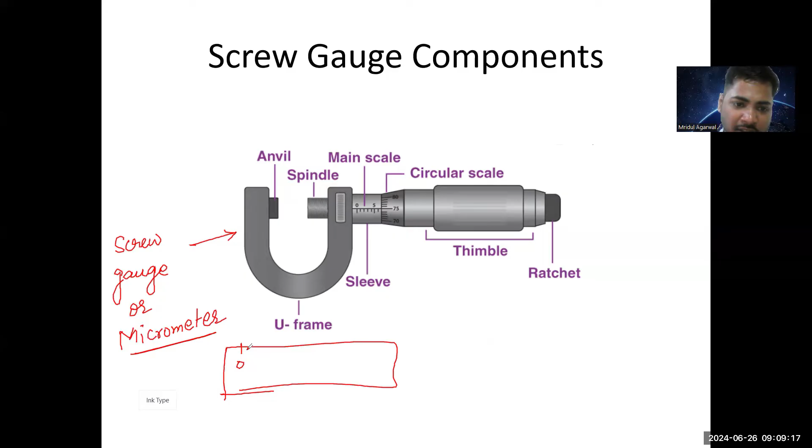Since you have used your daily scale, you have 0, then 10 divisions like this, and this is 1. You generally measure around 0.1 centimeter from this. But by using a screw gauge, you can measure up to higher precision limits, up to 10 to the power minus 6 meters. You can also convert it into microns, and this is 1 micrometer only, so you can measure up to higher micrometer precision value.

So you can have a very precise measurement of whatever you are measuring. Let's say you want to measure a thing that has dimensions of 2.003 meter. In such a case you can measure up to this decimal place, up to 10 to the power minus 6 into 10 to the power 3 mm per mm, which is around 10 to the power minus 3 mm. So this is a very nice component in terms of measuring components to a very high precision value.

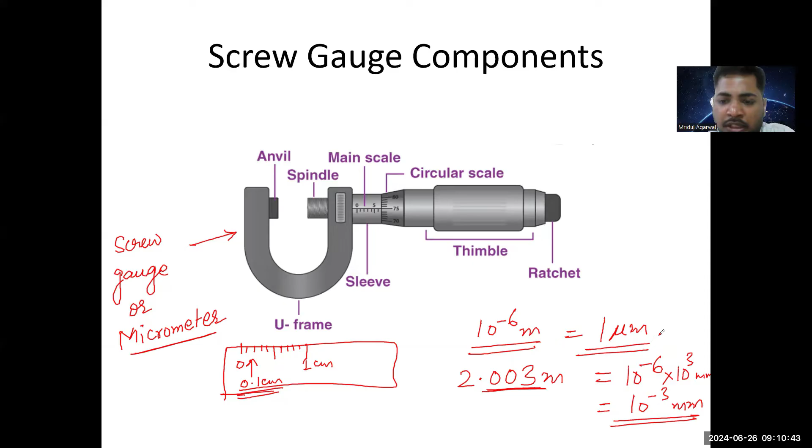We'll be talking about this zero error some time later. First, we'll discuss the working of the screw gauge.

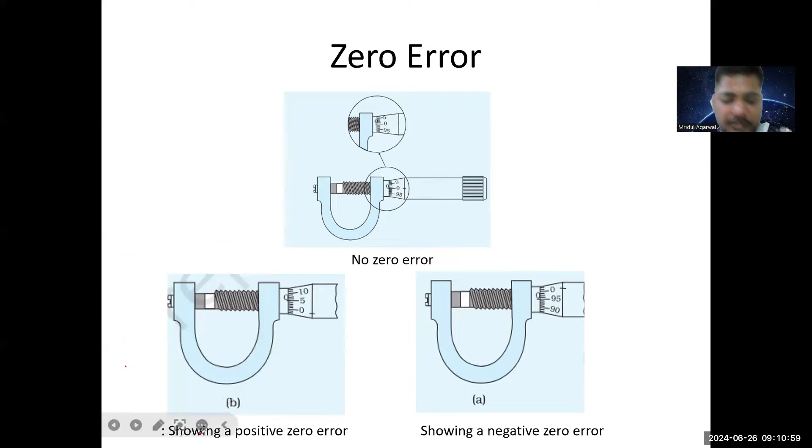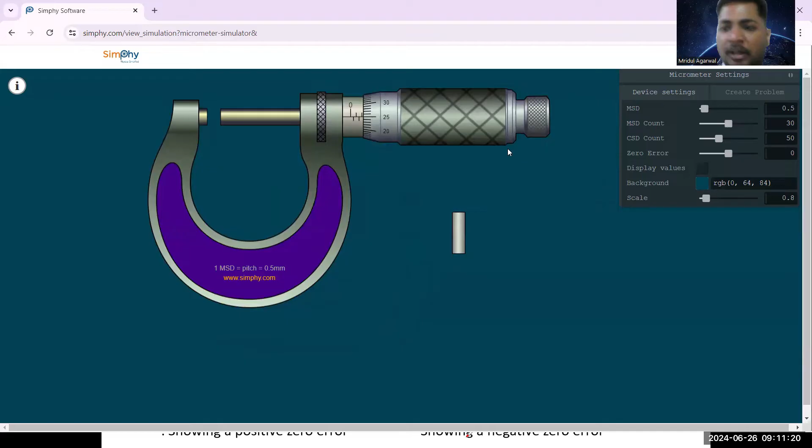In front of you, you can see a screw gauge like this, and you have a component like this. You can change the micrometer values according to your requirement. In this case, we are trying to measure the length of this component, and we'll adjust our screw gauge accordingly. Let me tell you about it.

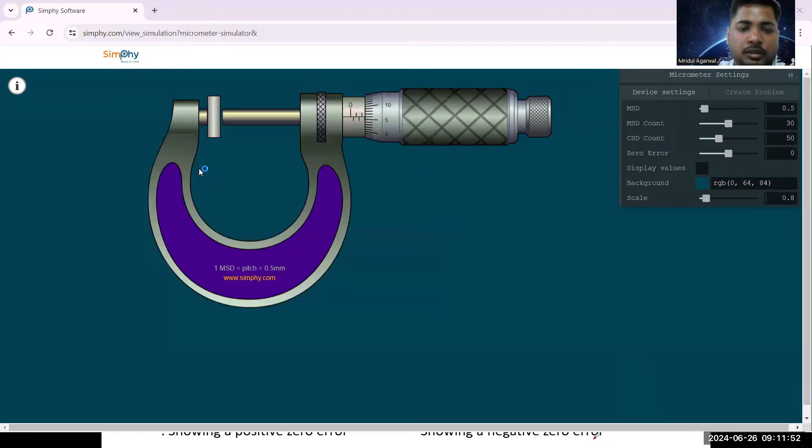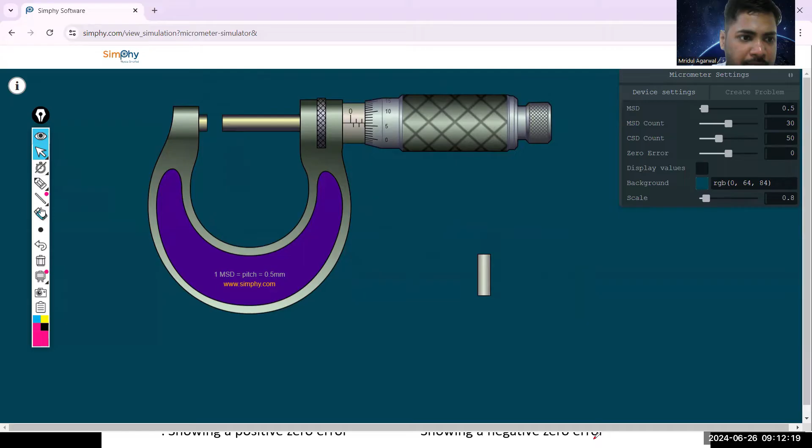Let me take this example. We have a component like this, and we want to measure the length of this component. Which length? This length we want to measure.

We have a linear scale like this. This is your linear scale. This is very important that you remember: this is your linear scale, and this is your circular scale.

You must have used screws in daily life. You've seen that when you try to rotate the screw, let's say you have a screw like this and you rotate it, it goes inwards. And when it goes inwards, it has some rotation involved in it.

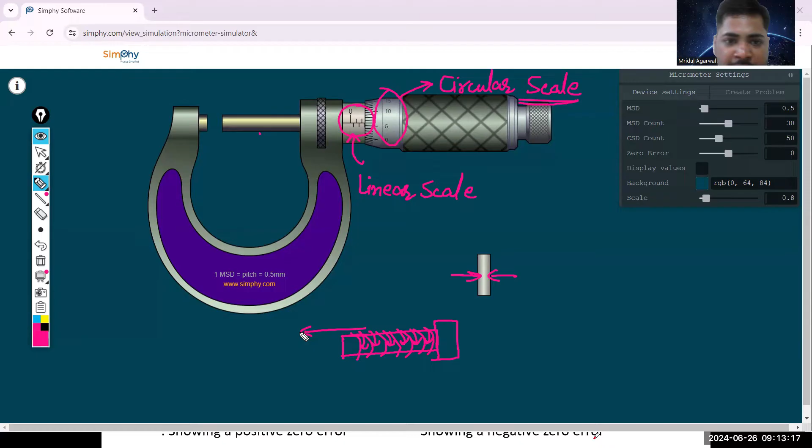Similarly, what happens here is when you put a component inside it, let's say this component is placed inside, you rotate this, and you get some linear scale reading and some circular scale reading. Depending on that, you measure the length and the values.

So we'll measure the length of this component. Let's say this is the dimension d that we want to measure. So how will you measure this dimension? In order to identify the length of this component, we'll have two readings.

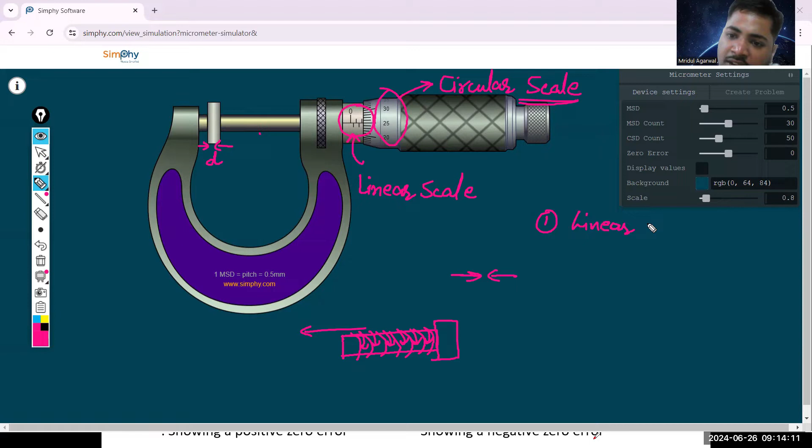First is the linear scale reading. From this we get the main scale divisions, and there's a rating written like: 1 MSD is equal to 0.5 mm. So this is one division. When talking about the division, we can count like this.

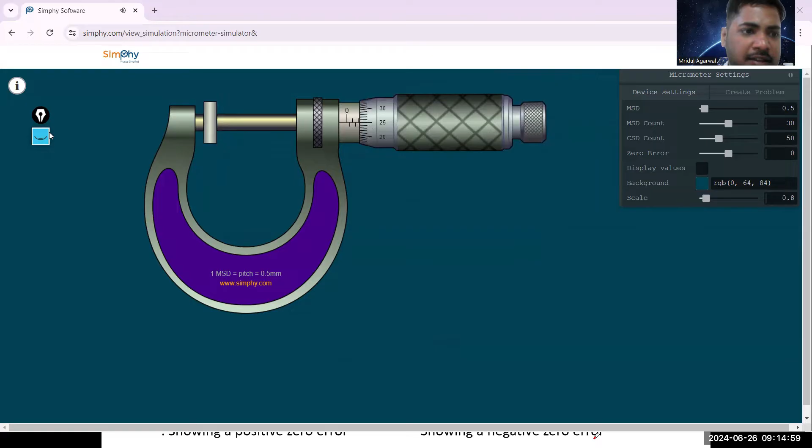You can also zoom like this. So when you put this component inside, what happens? Then you measure the linear scale reading. Let me rub this so you're able to see it clearly from the linear scale.

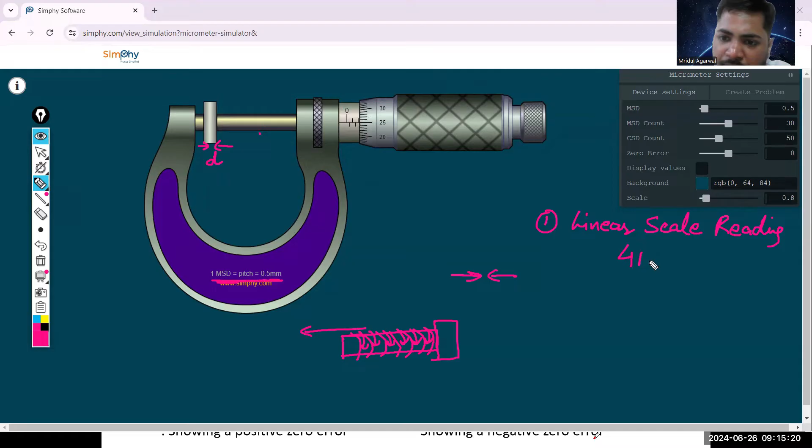You measure this: 4 divisions. So we have a linear scale reading of 4 MSD. So this is the linear scale reading, currently 4 MSD. And what is the value of 1 MSD? One main scale division is equal to 0.5 mm. So this is 4 times 0.5 mm, which becomes 2 mm.

Now we have the second reading that we want to take, and this is the circular scale reading. If you can see, this 25th division is coinciding with the linear scale. So the circular scale reading is currently 25.

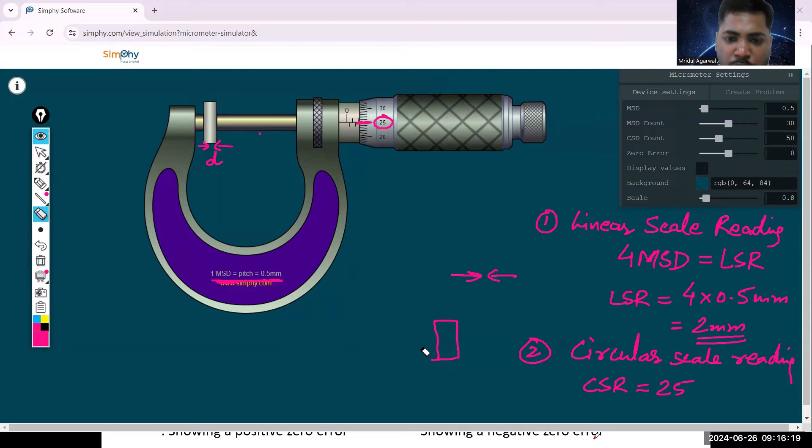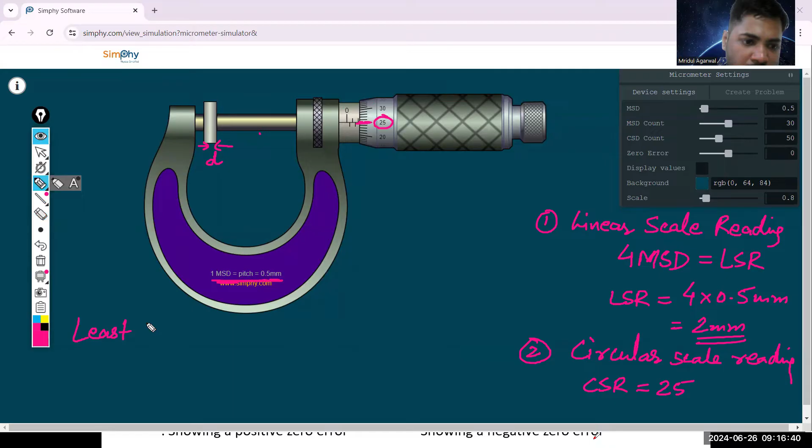And what is the least count of this screw gauge? For defining the least count, you have to understand this concept of pitch. What is pitch? Here we can see that when you rotate it one time, it moves some linear distance in the direction of the linear scale movement. Whatever length is traveled by the linear scale when you rotate it one time, that length is known as the pitch of this screw gauge.

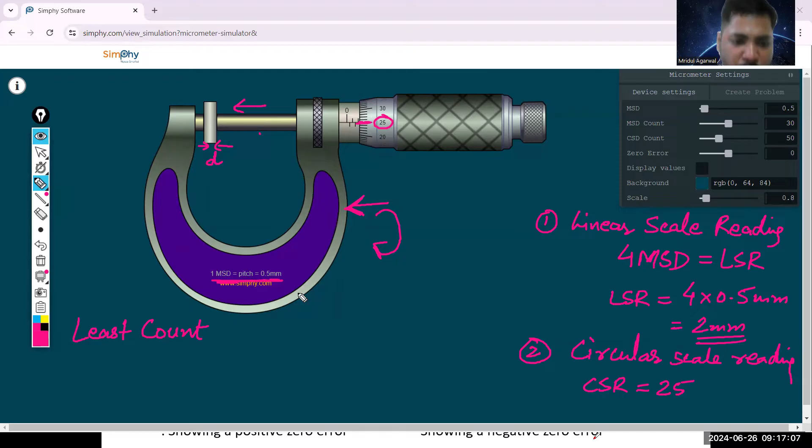So what is the pitch? Pitch is the linear length traveled by the linear scale on one complete rotation of the circular scale.

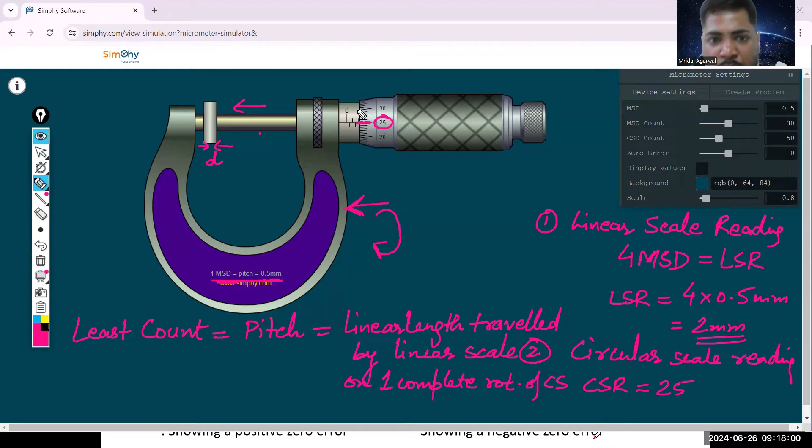And what we are trying to do is divide this pitch by the number of divisions on the circular scale. Why are we doing it? Because we want to find the length of one circular scale division in terms of the linear scale in a screw gauge. So we are going to divide by 50, because we have a CSD count of 50. So it means we have only 50 divisions available on this screw gauge.

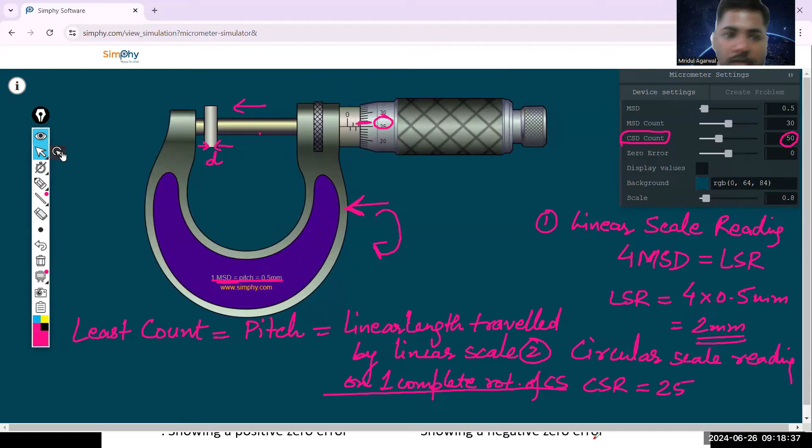We can also see this like this. You remove this, just a minute, and you remove this. You can see that it's only going up to 45 and then 0, isn't it? It goes up to 45 and then 0. So that means it has only 50 divisions involved in a complete rotation.

And for a complete rotation, it moves a linear distance of how much? That is pitch. Let me bring it to the original view like this. So the number of divisions involved in one complete rotation of this screw gauge is 50, as per the given condition.

Now this pitch divided by 50 would be our least count, because that is the minimum value we can measure using the screw gauge. So what is the pitch here? It is given as 0.5 mm. In any question, it will be given. So here the least count becomes: least count is pitch divided by 50, and this is 0.5 mm divided by 50. When you solve this, this becomes... let me rub this.

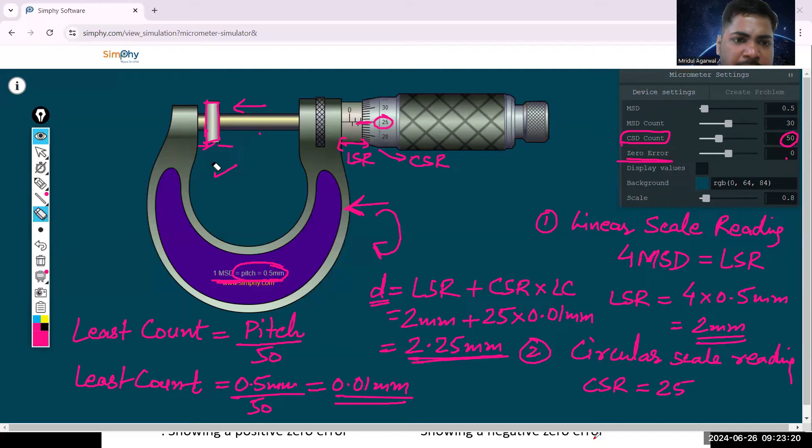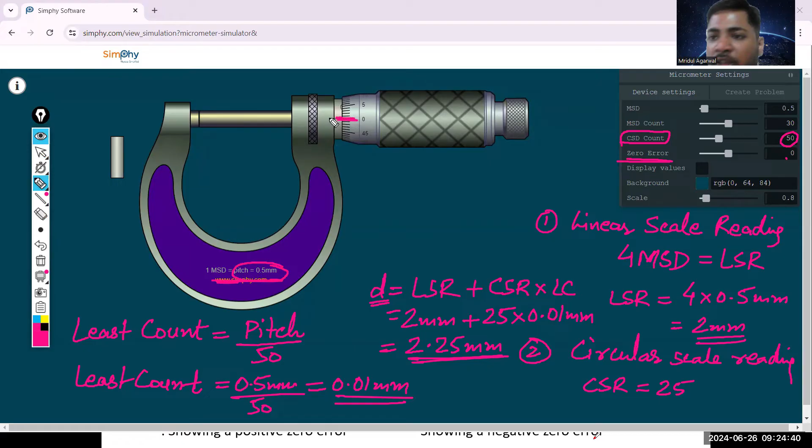When you bring this circular scale into contact with this linear scale, what happens? It's possible that at the initial time, when you are not measuring the length of any component, you are just trying to put these two hands, these two spindles, into contact directly without putting any component in between. When you bring it into contact, you can see that the zero is coinciding with the zero. The zero of the linear scale is coinciding with the zero of the circular scale. When that happens, then you have no zero error.

Now suppose these two spindles are joined to each other, and we have a zero error in this case. Let me show you how. Over here, we can see this is completely a 50 circular scale division screw gauge, and out of that, the 40th division is already coinciding with the zero of the linear scale initially. So when you are putting no component in between the spindles, the 40th division of this circular scale is coinciding with the zero. So the zero of this circular scale is above the reference line, and when it is above the reference line, we have a negative zero error.

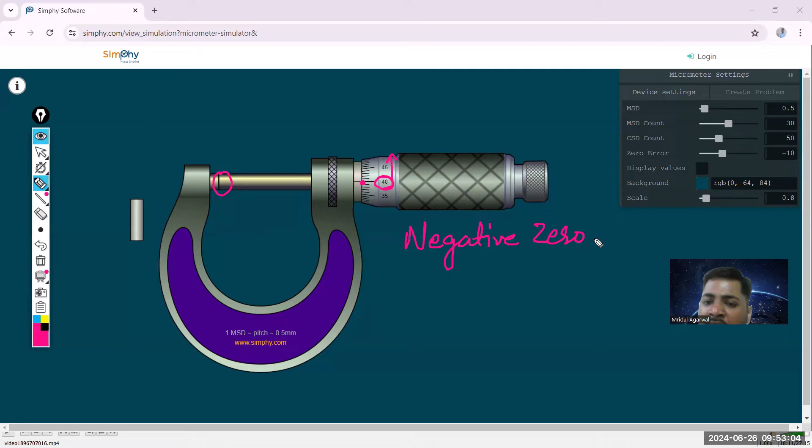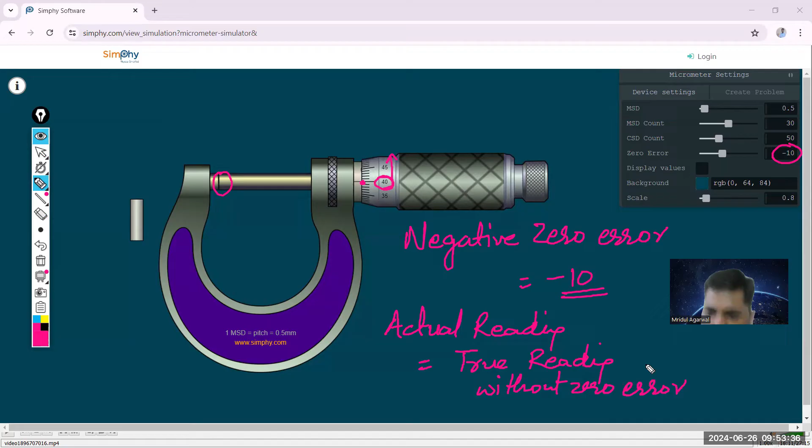We have a negative zero error. And by how much? The zero of the circular scale is above the zero of the linear scale by 10 units, you can see that. So we have a negative zero error of minus 10. So when you are taking the readings, the actual reading would be the true reading without zero error, minus the negative zero error. So this minus 10 has to be multiplied with the least count, and then it is to be subtracted from the true reading.

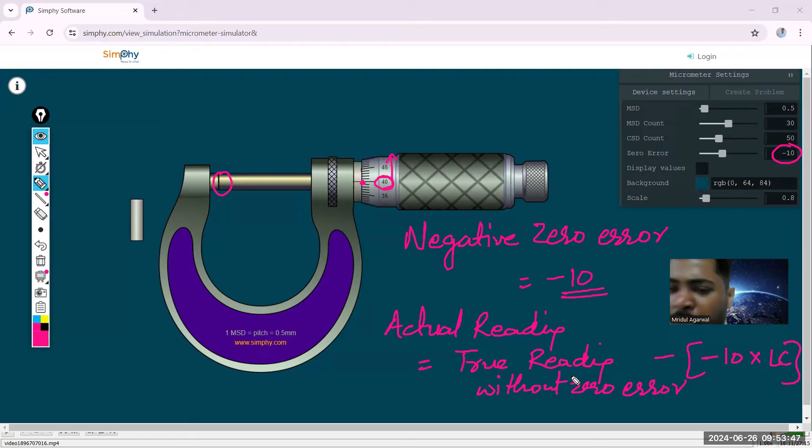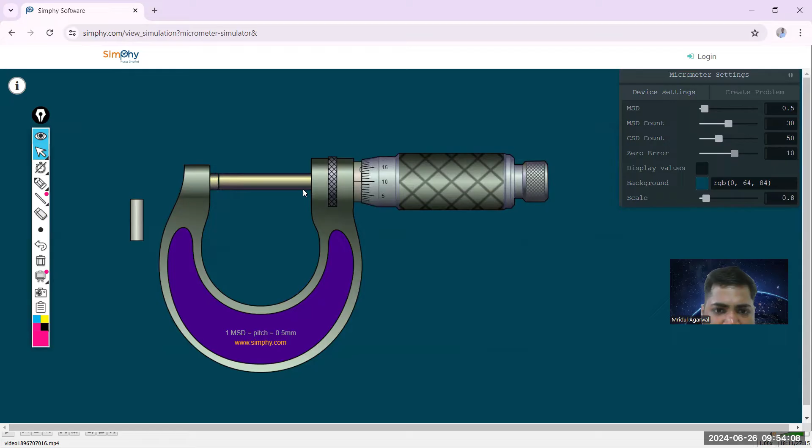Now, if there is a negative zero error, this is your case. When you have a positive zero error, what will be the case? Let me show you this. Suppose you have a positive zero error of, let's say, 10 units. Then the zero of the linear scale is coinciding with the 10th unit of the circular scale. So in this case, the two spindles are coinciding with each other, but the zero of the linear scale is coinciding with the 10th unit of the circular scale. So in this case, there is a positive zero error.

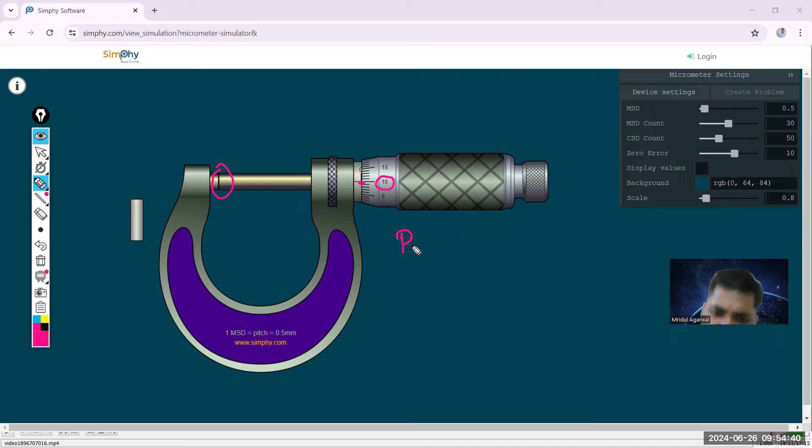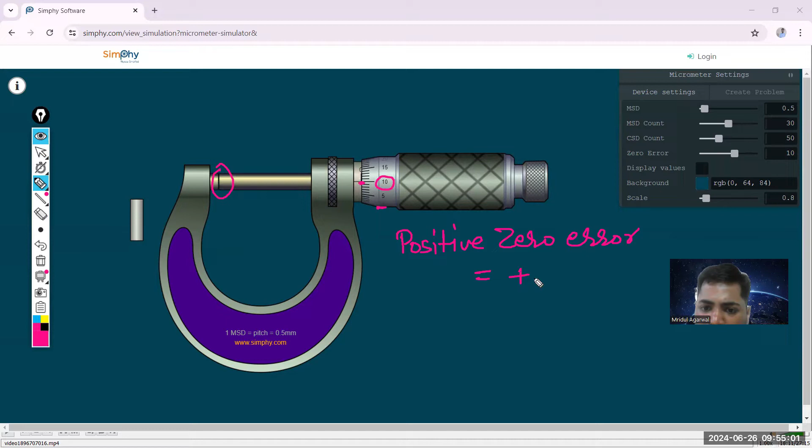There is a positive zero error because the zero of the circular scale is lying below the zero of the linear scale by 10 units. So this is the positive zero error of plus 10 into least count.

For the reading to be taken, you have to take the reading without zero error, the without-zero-error reading, and then you have to subtract this positive zero error.

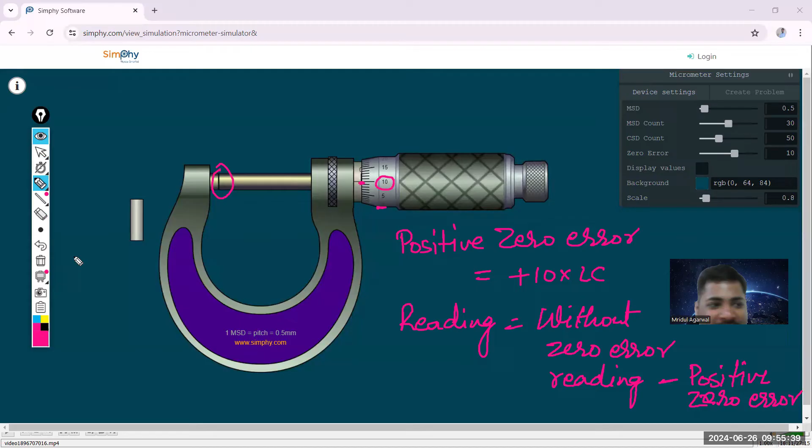Why do we have to subtract and add? This thing is a bit logical, and these are not given in the books also. So first we try to understand why we are subtracting or adding.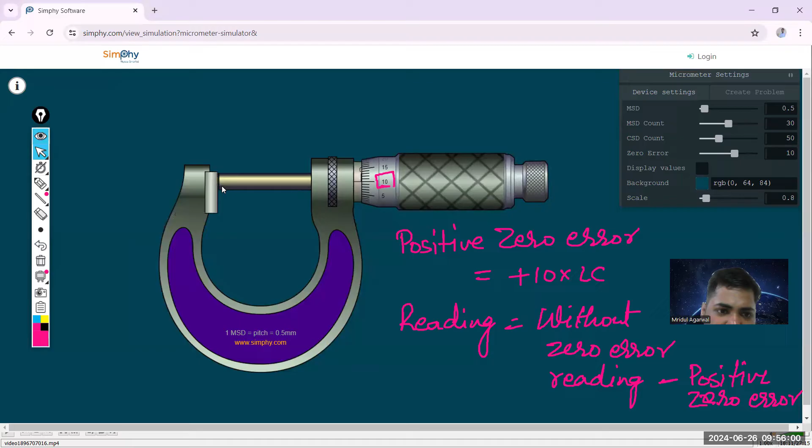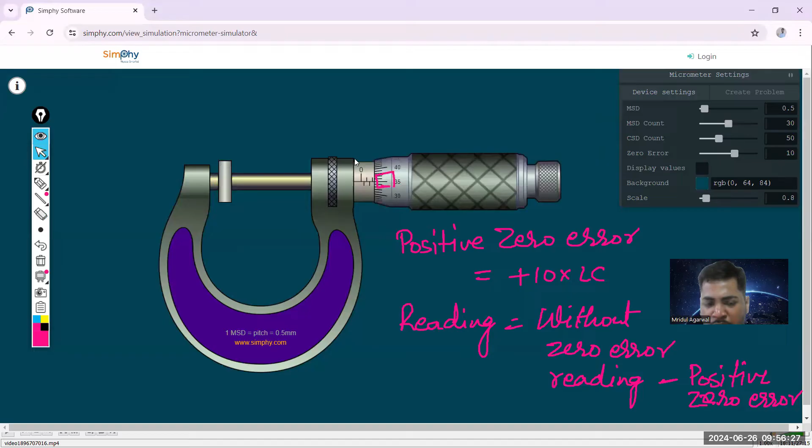Let's suppose you are already 10 units above, and when you are putting this object between them, then definitely your reading is going to be increased. But whatever reading is displayed here already has a zero error of plus 10 into least count, because when this component was not there in between the two spindles, the zero was not coinciding with the zero.

Let me show you: the 10th division was coinciding with the zero of the linear scale. So in this case, it must have rotated anti-clockwise from your direction, starting from 10.

And going to, let's say, 35. So it must have moved only 25 in real sense. So it must have moved only 25.

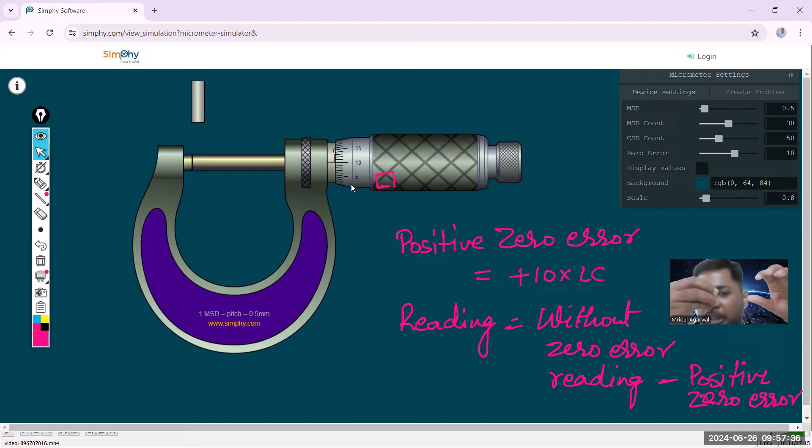So you just see what you are trying to do: you are taking the net reading as 25. Why? Because what you see is 35, but there is already an extension of 10 units when no component was there. So when there is no component between the spindles, you have 10 units, and now you are displaying 35 units. So there must be a rotation of 25 divisions only. That's why we are subtracting this positive zero error.

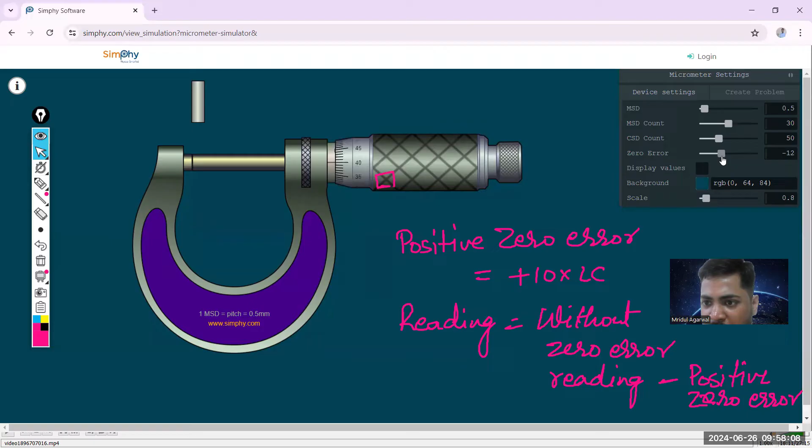In case of the negative zero error, what is happening is we are already behind. Let's say we are behind 10 divisions.

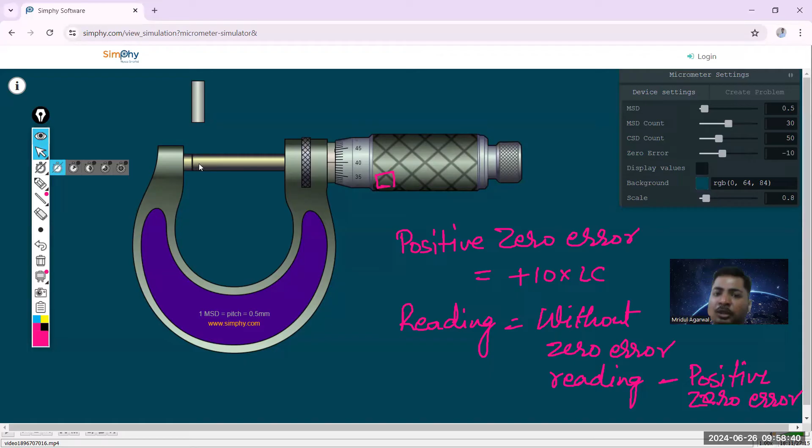So what is happening like this? Now, when you are putting these two spindles together, the 40th unit is displayed and the zero is above. So when you are rotating anti-clockwise from your end to put any component in between, then definitely you have to have rotation.

And whatever rotation has taken place, let's say it goes from 42 to, let's say, 25 or 35. So what it says now, here it is 15 - so how has it gone to 15? It must have gone to 15 units from 0, and then that 10 units extra, because you started from 10 units early.

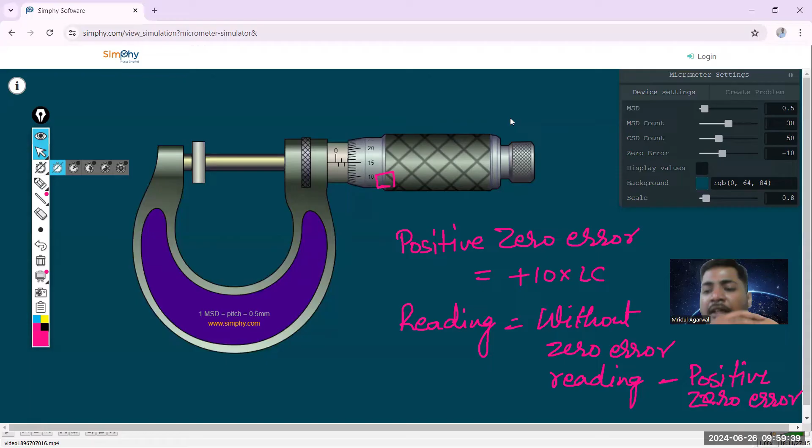Because it was displaying 40. So when you are moving it anti-clockwise, you are rotating it by 10 and then 15 to get to the point of 15. So actual rotation is 15 plus 10 times the least count. That's why the negative zero error is coming into place.

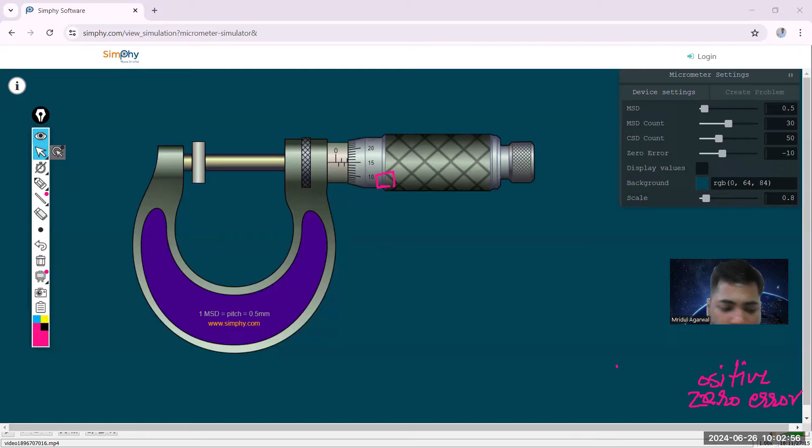चलिए देखते हैं यहाँ पे। मान लेते हैं आपके पास ये पहली प्रॉब्लम है। आपको क्वेश्चन में दिया हुआ है कि 10 rotations of the cap of the screw gauge is equivalent to...

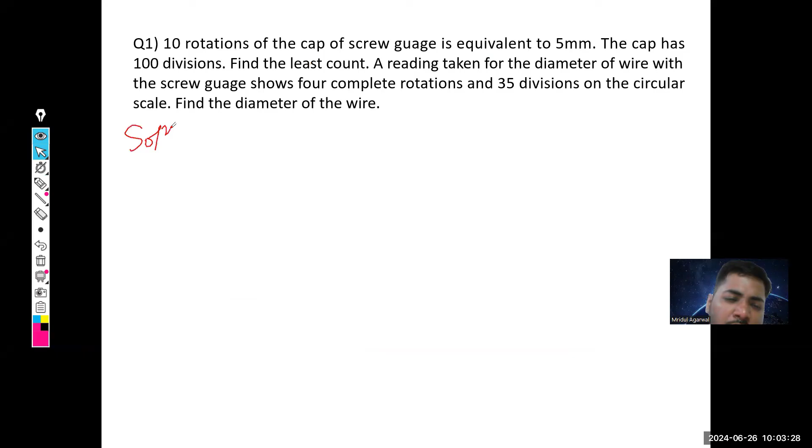10 rotations of the cap of the screw gauge is equivalent to 5 mm. So for one rotation we have to find the pitch. अगर मैं pitch की बात करूं तो one rotation के लिए pitch कितना हो जाएगा? 5 mm divided by 10। तो ये कितना हो जाएगा? 0.5 mm। तो ये हो गया आपका pitch।

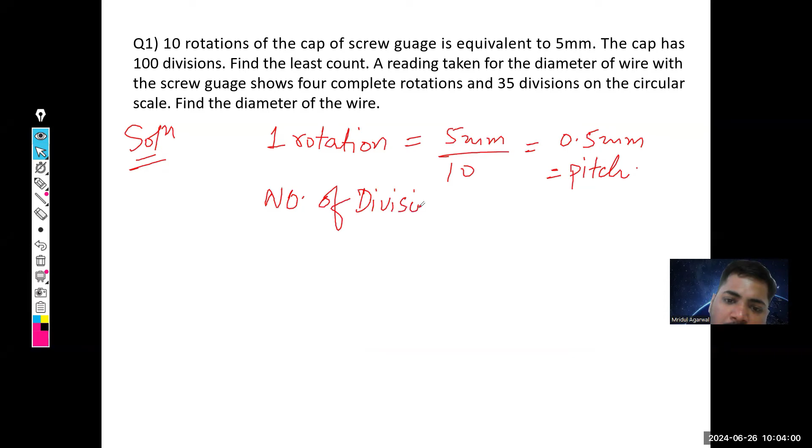ठीक है, द कैप हैज 100 डिविजन्स। तो यहाँ पे अगर हम देखें नंबर ऑफ डिविजन्स ऑन सर्कुलर स्केल कितना है, तो हम देख पा रहे हैं ये 100 डिविजन्स है। तो यहाँ पे लीस्ट काउंट कितना हो जाएगा? लीस्ट काउंट मैंने बताया था आपको, पिच अपॉन नंबर ऑफ डिविजन्स, यही होता है। तो ये हो जाएगा आपका पिच 0.5 mm डिवाइडेड बाय 100 से, तो ये कितना आ जाएगा 0.005 mm।

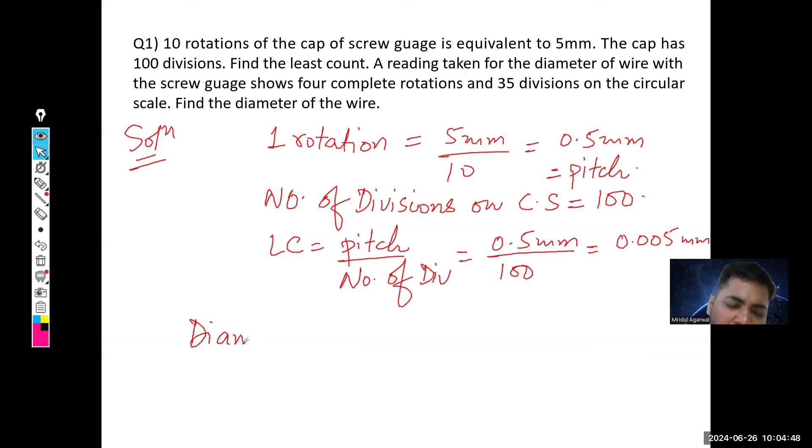ओके, अब यहाँ पे अगर हम देखें क्या दिया है, a reading taken for the diameter of the wire with the screw gauge shows 4 complete rotations and 35 divisions on the circular scale। तो diameter of the wire हमको फाइंड करना है, तो हम डायमीटर कैसे फाइंड करते हैं? तो डायमीटर के लिए रीडिंग हो गई, और हमने बताया था आपको लीनियर स्केल रीडिंग प्लस सर्कुलर स्केल रीडिंग इनटू लीस्ट काउंट। तो यहाँ पे अगर हम देखें तो ये सिंपल सॉल्व हो जाएगा।

लीनियर स्केल रीडिंग आपकी कितनी है, क्योंकि क्या कह रहा है ये 4 कंप्लीट रोटेशन। तो 4 कंप्लीट रोटेशन मतलब एक कंप्लीट रोटेशन में पिच के बराबर मूवमेंट करता है, तो 4 रोटेशन के ये कितना हो जाएगा 4 इंटू 0.5 mm प्लस सर्कुलर स्केल रीडिंग कितनी है इसकी 35, और लीस्ट काउंट कितना है इसका 0.005 mm।

तो अगर मैं यहाँ पे सॉल्व करता हूँ ये कितना बन जाएगा, तो ये आ जाएगा 4 टाइम्स 0.5 प्लस 35 इंटू 0.005, तो ये आ जाएगा 2.175। तो ये इसका फाइनल डायमीटर होगा, डायमीटर ऑफ द वायर।

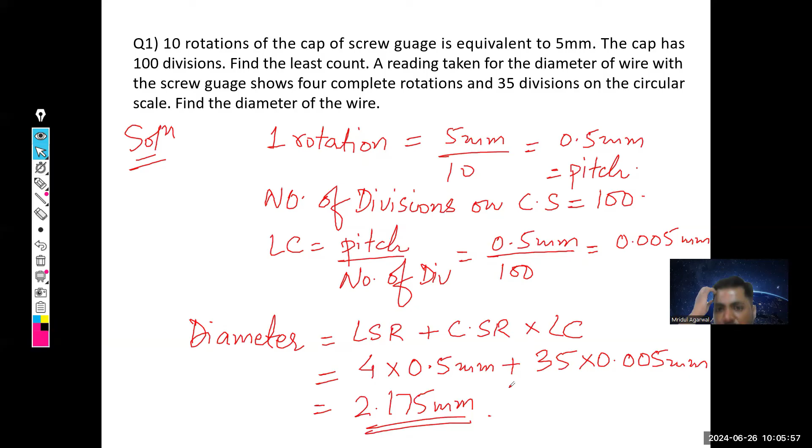ठीक है, वो भी आपको पॉइंट क्लियर हो गया होगा। नेक्स्ट क्वेश्चन करते हैं। नेक्स्ट क्वेश्चन दिया है कि circular head of the screw gauge is divided into 200 divisions and move 1 mm ahead in one revolution. If the same instrument has a zero error of minus 0.05 mm. The reading on the main scale in measuring the diameter of the wire is 6 mm, then and that on the circular scale is 45। Find the diameter of the wire।

अगर हम यहाँ पे ध्यान से देखें कैसे बना सकते हैं इस क्वेश्चन को, तो देखिए कितने डिविजन दिए हुए हैं। The circular head of the screw gauge is divided into 200 divisions। तो यहाँ पे नंबर ऑफ डिविजन्स ऑन सर्कुलर स्केल कितना हो जाएगा, ये हो जाएगा 200। और यहाँ पे पिच जो दिया है, ये पिच इसने दिया है 1 mm अहेड। तो अगर मैं लीस्ट काउंट निकालना चाहूँ तो लीस्ट काउंट कितना हो जाएगा 1 mm डिवाइडेड बाई 200। तो ये कितना हो जाएगा, ये हो गया 0.005।

ये हो गया लीस्ट काउंट। If the same instrument has a zero error of -0.05 mm, हमको पता है ये -0.05 mm है, तो इसका मतलब हमें ऐड करना है। The reading on the main scale in measuring the diameter of the wire is 6 mm and that of the circular scale is 45। डायमीटर निकालना है। तो अगर मेरे को डायमीटर निकालना है, कैसे निकालेंगे? हमको पता है डायमीटर के लिए जो मेन स्केल रीडिंग है वो कितनी है 6 mm, प्लस that on the circular scale कितनी है 45 इंटू लीस्ट काउंट कितना है 0.005 mm। और हमको पता है यहाँ पे इस इंस्ट्रूमेंट के पास जीरो एरर कितने का है -0.05 का है, तो इसको हम सब्ट्रैक्ट कर देंगे।

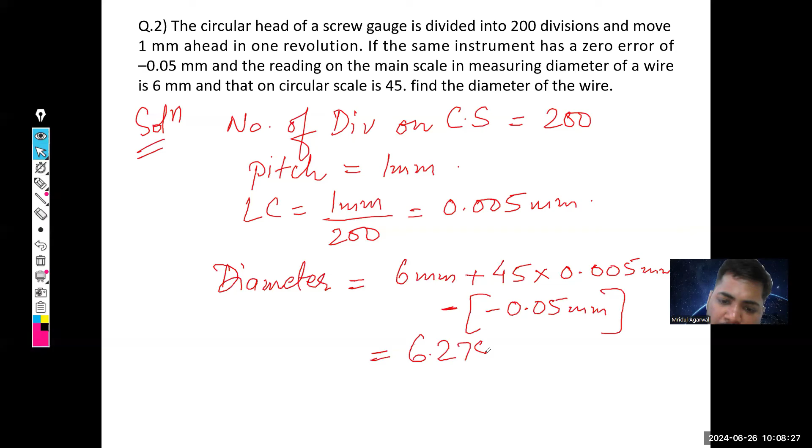तो यहाँ पे कितना आ जाएगा 6 + 45 टाइम्स 0.005, 0.05, तो ये हो जाएगा 6.275 mm। तो यहाँ पे जो डायमीटर ऑफ द वायर आया है वो कितना है, 6.275 mm। वो भी आपको क्लियर हो गया होगा। नेक्स्ट क्वेश्चन करते हैं।

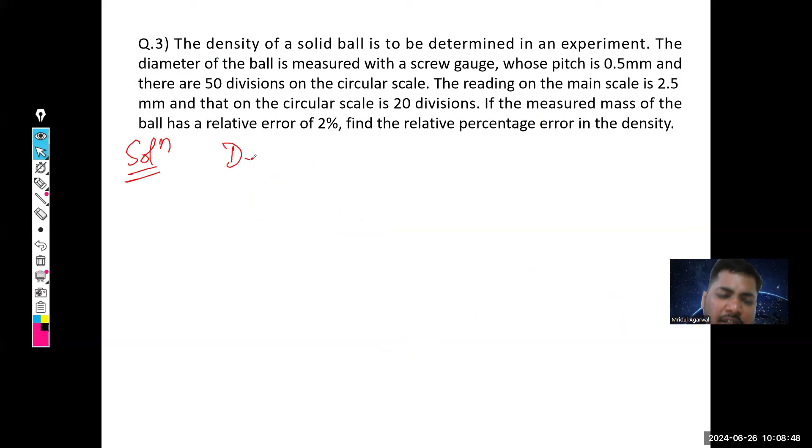नेक्स्ट क्वेश्चन दिया है कि डेंसिटी ऑफ द सॉलिड बॉल इज टू बी डिटरमाइंड इन एन एक्सपेरिमेंट। डेंसिटी निकालनी है। डेंसिटी होता है किसी भी सॉलिड बॉल या किसी भी ऑब्जेक्ट का, मास अपॉन वॉल्यूम।

द डायमीटर ऑफ द बॉल इज मेजर्ड विद स्क्रू गेज हुज पिच इज 0.5 mm, और देयर आर 50 डिविजन ऑन द सर्कुलर स्केल। तो नंबर ऑफ डिविजन कितने हो गए सर्कुलर स्केल पे, यहाँ पे ये 50 डिविजन। द रीडिंग ऑन द मेन स्केल इज 2.5 mm। तो जो मेन स्केल रीडिंग है वो आपको पता है, कितनी पता है, 2.5 mm, एंड दैट ऑन द सर्कुलर स्केल इज 20 डिवीजन। सर्कुलर स्केल रीडिंग भी आपको पता है ये कितनी है, 20 है।

मेजर्ड मास एज अ परसेंटेज एरर, तो रिलेटिव एरर परसेंटेज एरर इन द डेंसिटी भी निकालना है। तो यहाँ पे अगर हम देखें कैसे कर सकते हैं इसे, बस परसेंटेज एरर इन डेंसिटी आपको निकालना है, तो इसके ऊपर फोकस करते हैं। तो पहले हम डायमीटर निकाल लेते हैं। अगर मैं डायमीटर निकालना चाहता हूँ तो डायमीटर कितना हो जाएगा, मेन स्केल रीडिंग प्लस सर्कुलर स्केल रीडिंग। सर्कुलर स्केल रीडिंग कितनी है 20 इंटू लीस्ट काउंट, लीस्ट काउंट है इसका 0.5 mm डिवाइडेड बाय 50। क्योंकि ये 0.5 mm क्या हो गया पिच, और 50 क्या हो जाएगा आपका नंबर ऑफ डिविजन ऑन द सर्कुलर स्केल। ये आपका आ गया।

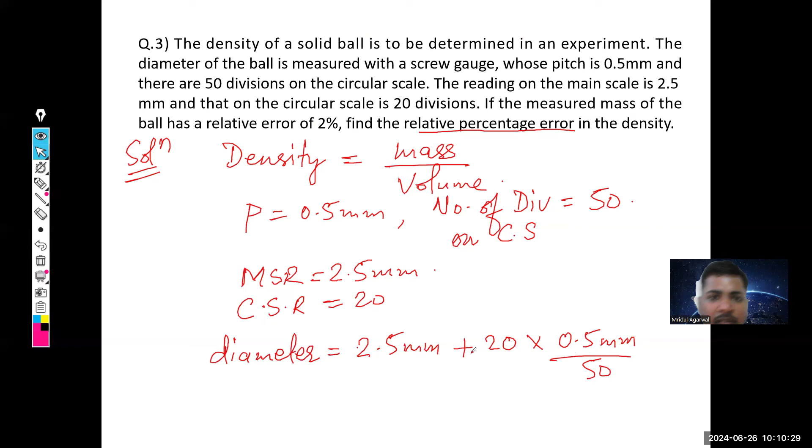देन अगर हम देखें यहाँ पे ये वैल्यू कितनी आ जाएगी डायमीटर की, 2.5 प्लस, तो ये आ जाएगा 2.7 mm। ये डायमीटर आ गई। अगर मैं यहाँ पे देखूं तो अगर डायमीटर में एरर कितना आ सकता है, तो डेल्टा डी कितना हो सकता है, अगर हम देखें तो वो लीस्ट काउंट के बराबर हो सकता है। तो लीस्ट काउंट कितना है इसका, 0.5 डिवाइडेड बाय 50, जो हो गया 0.01 mm का एरर।

हमको पता है एरर कैसे निकालते हैं, जैसे डेंसिटी जो होता है वो होता है मास अपॉन वॉल्यूम। तो डेंसिटी अगर मैं रो से रिप्रेजेंट करता हूँ तो मास m अपॉन वॉल्यूम 4/3 पाई r³ या फिर d/2 का होल क्यूब। अगर मैं देखूं यहाँ पे तो जो भी एरर होगा डेल्टा रो बाय रो कितना हो जाएगा, डेल्टा m/m प्लस 3 इंटू डेल्टा d/d, क्योंकि हमें मालूम है कांस्टेंट कोई भी नहीं लेते हैं एरर।

अगर मैं परसेंटेज एरर डेल्टा रो बाय रो निकालना चाहता हूँ तो कैसे निकालूंगा? परसेंटेज एरर इन मास आपको दिया है 2%, प्लस 3 इंटू कितना परसेंटेज एरर है डायमीटर के अंदर, तो ये है 0.01, कितने पे, 2.7 पे। तो ये कितना हो गया आपका? इसको मैं परसेंटेज में लिख दे रहा हूँ। ये हो गया, मतलब अभी यहाँ पे हमने फ्रैक्शन निकाला है, इनटू क्या करना पड़ेगा, 100 करना पड़ेगा।